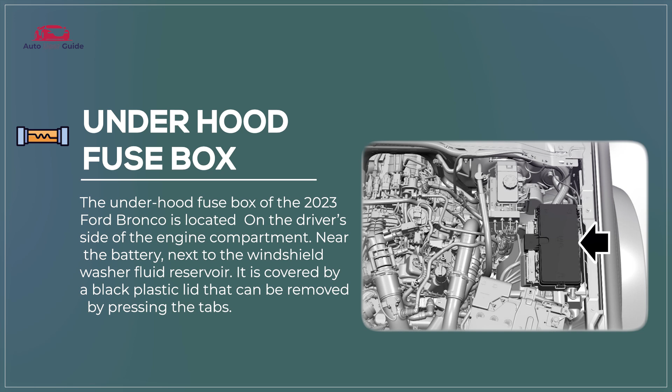Underhood fuse box. The 2023 Ford Bronco underhood fuse box houses essential fuses for critical systems like the engine and lighting. It features a durable, water-resistant cover to protect components. Clearly labeled fuses make it easy to identify and replace as needed.

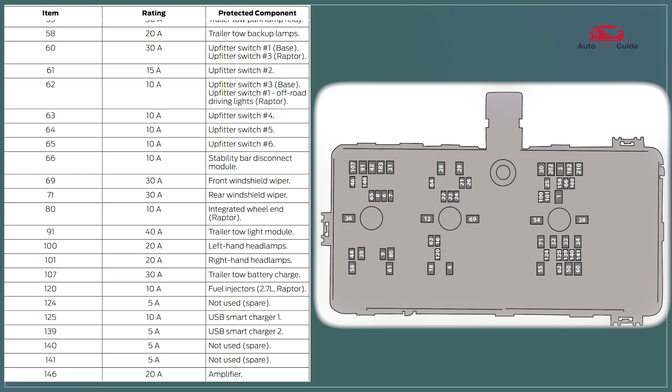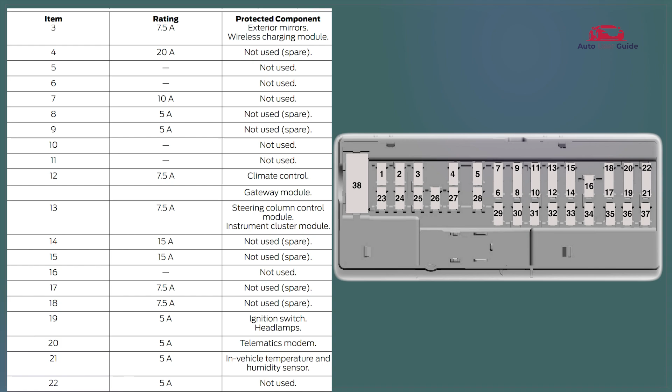Body control module fuse box. The 2023 Ford Bronco Body Control Module, BCM, fuse box manages key electrical functions like interior lighting and door locks. It is compactly housed inside the cabin for easy accessibility.

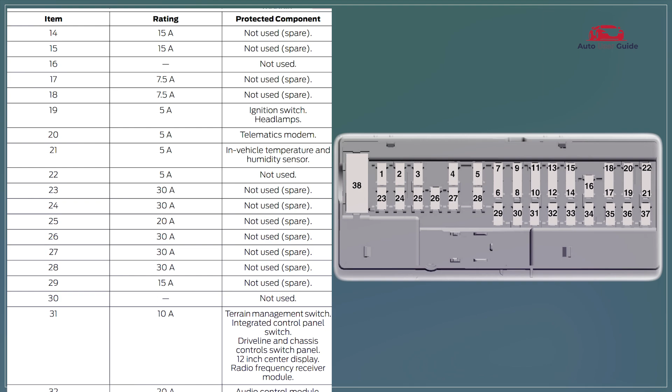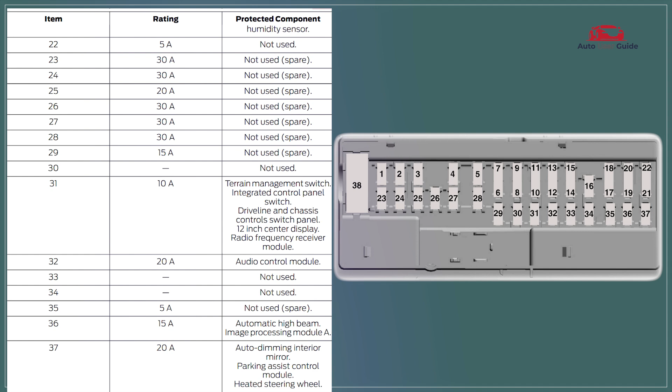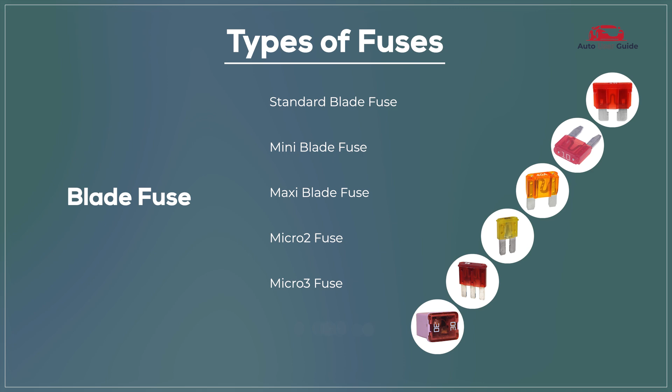Types of fuses: blade fuse, standard blade fuse, mini blade fuse, maxi blade fuse, micro 2 fuse, micro 3 fuse, J-case fuse.

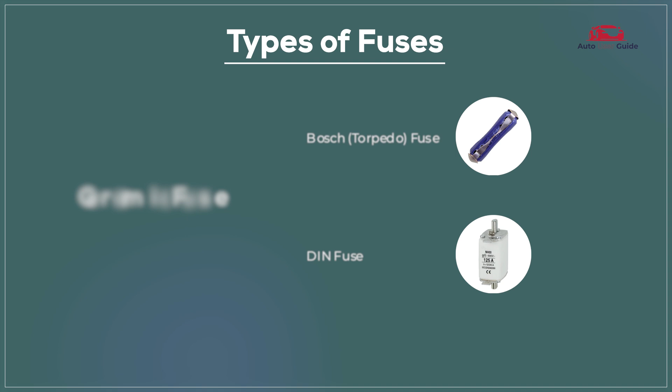PAL fuse, low profile PAL fuse, standard PAL fuse. Link fuse, mega fuse, high amperage link fuse.

Fuse conditions: blown fuse. A blown fuse means it's no longer functioning and needs replacement, while a perfect fuse is in good working condition and performing as expected.

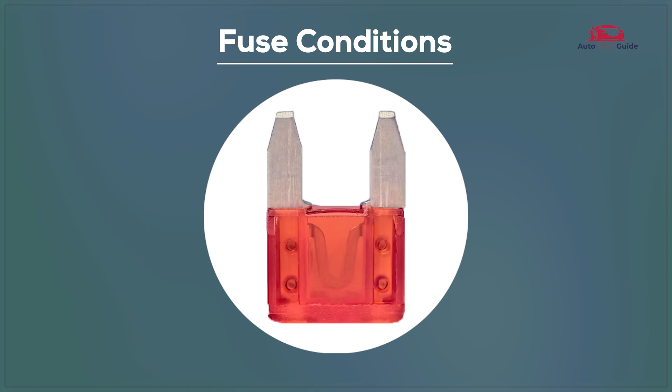How to change fuses: turn off the vehicle. Locate the fuse box. Identify the faulty fuse. Remove the faulty fuse. Inspect and obtain a replacement. Install the new fuse. Test the replacement.

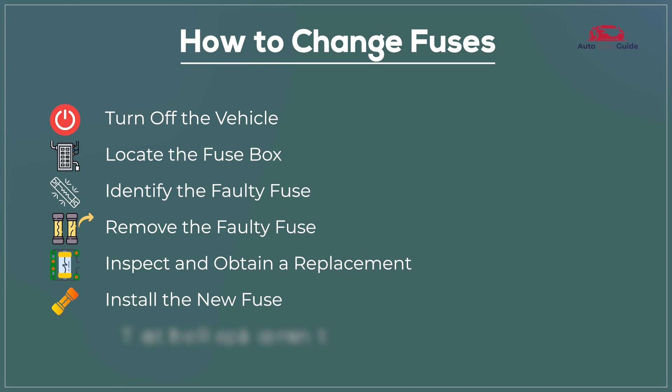Safety precautions: disconnect the battery. Wear protective gear. Use proper tools. Check for correct amperage. Avoid water exposure.